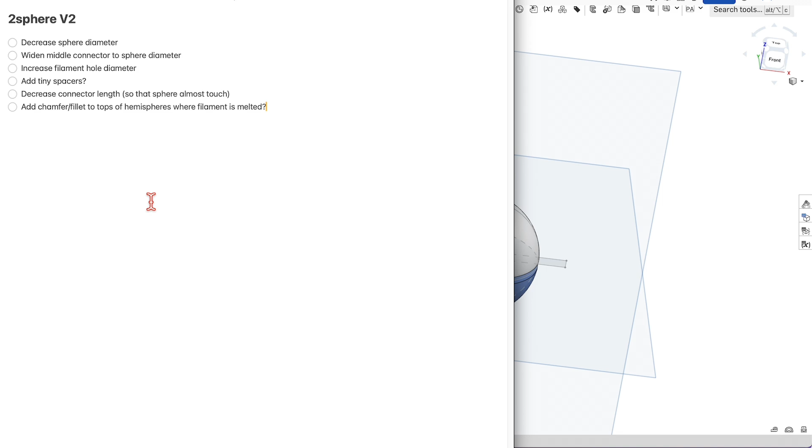So here we go. 60 minutes starting right now. Okay, that's not going to include 3D printing time. This is going to just include designing time, probably. I don't know. I make up the rules as I go. So there are a few things I want to change about this. And what I suggest whenever you are designing something is to have a list of the things that you want to change or the changes that you're going to make for V2.

So this was V1. Some of the things that weren't working well: the holes that I designed in here for the filament to go through were not large enough. Actually, let me just show you this. That probably makes more sense. Here we go. So here we are in OnShape, which is what we're using for modeling right now, and you can see that we have this model here.

The holes right here that run all the way through both hemispheres for the filament were not large enough because you need to make the hole a little bit larger when you're 3D printing it, because of the tolerances of the printer and all that. So it's going to end up a little smaller generally. So I had to drill those out to actually fit. So we're going to enlarge those a little bit.

Let's go back to our list just to show you some of the things that we're going to do here. We're going to decrease the sphere diameter because I feel like they're just a little bit too big. So the idea with this, I probably should have mentioned this: the reason why this is fun is you can roll it around in your hands, like those steel stress ball things, or maybe they're magnets. I'm not really sure. That's fun. You can also take it and spin it like that, which is fun too.

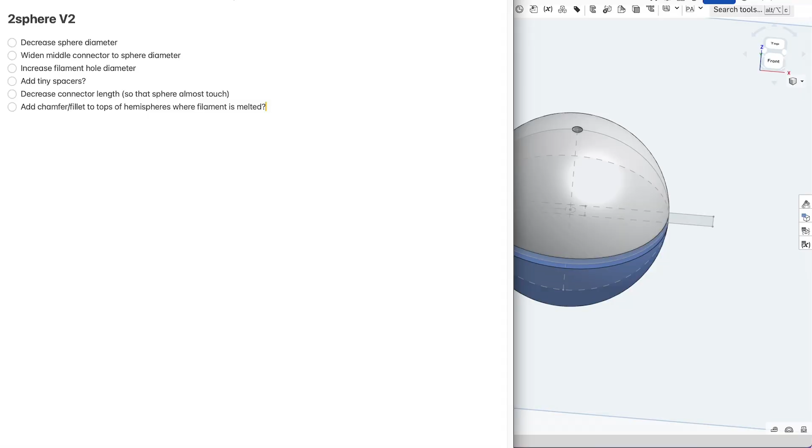So step one, we're going to get into our sketches here. Like I said, this has already been designed, so we're just going to be going into this and modifying it. I'm not going to explain a lot of what I'm doing exactly, but hopefully you'll kind of learn as we go. I'll try to narrate a little bit. All right, so actually I'm going to narrate a lot. Basically this is not a tutorial, but it's more of like a come along for the ride. But I can't really help but narrate stuff because I talk to myself anyway.

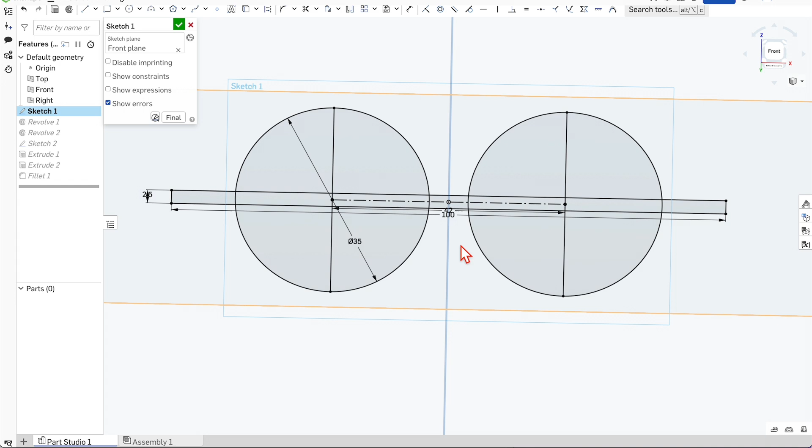So 40 millimeters is the diameter of the hemisphere, and these are the two circles that I built this shape off of. So we're going to change that to, I think 35 would be good, and they are mirrored, I think. All right, excellent. So we've already decreased the diameter, which you'll notice makes more of the middle connector showing. So we also want to change the middle connector.

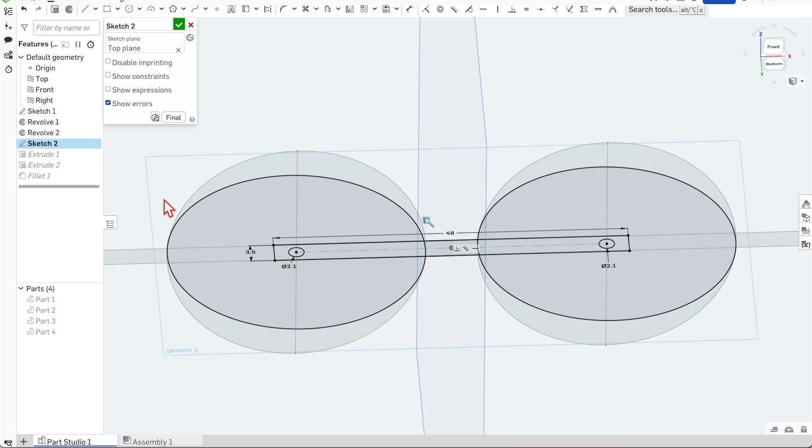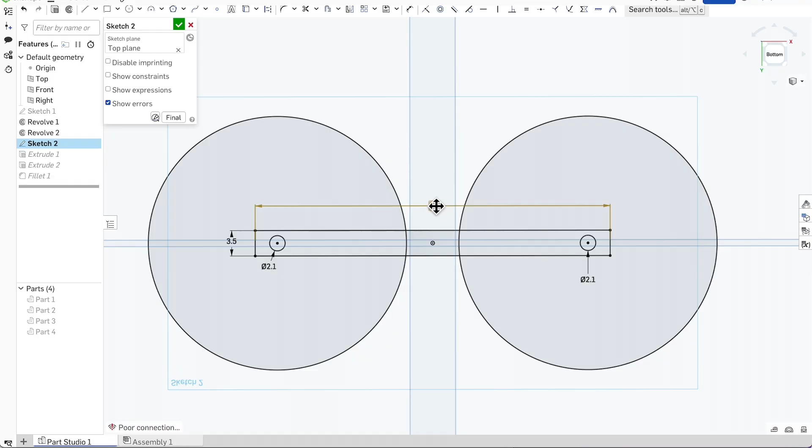You can see when I run the mouse over Sketch 2, that's the connector sketch. Let me hide everything else so that we just get that one sketch. Hide that sketch as well. I've used the circles from that previous sketch into this sketch, which actually, now that I think about it, I guess I could just use those, huh? Oh yeah, okay. So let's take, oh, okay, that might screw everything up. This is the part that I'm not super great at with CAD modeling, keeping everything so that it lines up well and so that it's easy to make changes to things I've already done.

All right, so let's take the 48 millimeters. So if we have 35 and 35, then we want 36 maybe between the pivot points. Oh, except that's not between the pivot points. That is between the ends. Ooh. So what I want to do is, okay, I'm going to press D to get the dimension. We're going to do L and then Q to make it a construction line just for reference. And then I'm going to drag that to the other circle. Let me see if this will work now. So now we're going to do D. We're going to dimension that line.

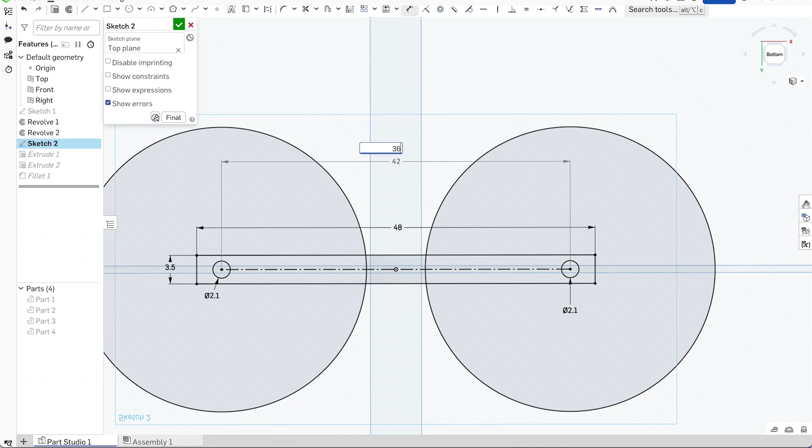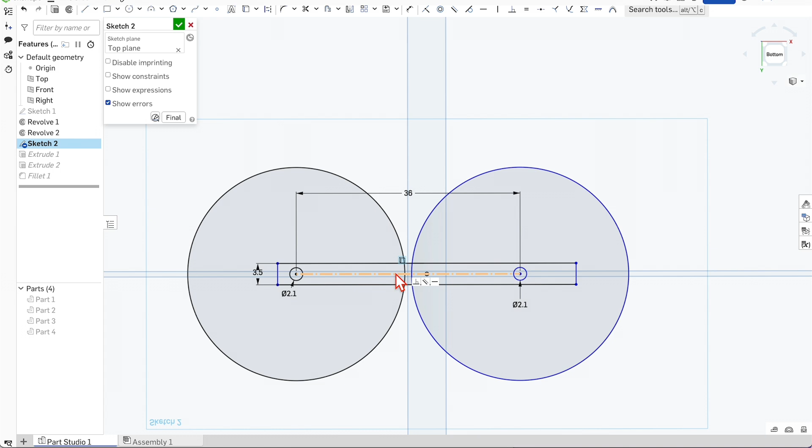So 42 millimeters is what it was. So we had essentially a 2 millimeter distance between the circles. But now I really actually want like 36. So the diameters of those are 35. So let's make it 36. And that's not working, probably because I have this dimension here. Can I delete that? 36, can we do that? We can't do that. Let's see. Oh, okay. Something is locked? There we go. Okay, cool. Great. All right. So let's see what that does when we show all of our parts here.

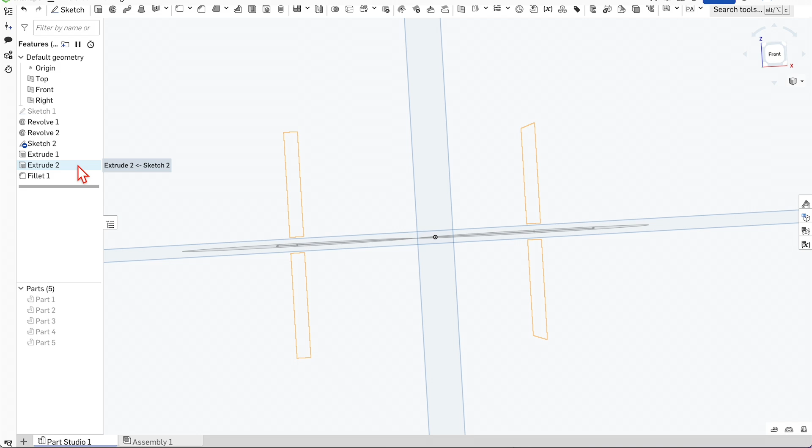So what that has done is, basically not nothing, but let's see, so that one's lined up. This one is not lined up. Is it because of the extrude? Well, that extrude was based on sketch 2. So I've changed sketch 2. So why hasn't that changed as well? Looks like we've got a conundrum on our hands.

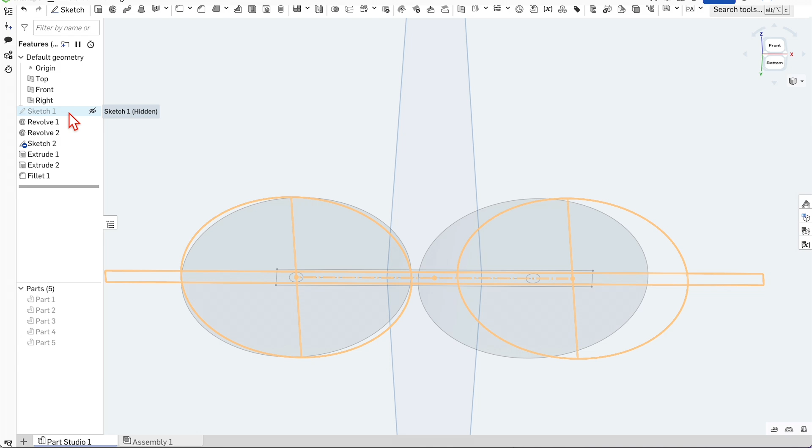So sketch 1. All right, so these need to be lined up. These should be lined up. What's going on with sketch 1? Oh, okay. So I did change the diameter, did not change the distance between the two circles. Okay, my bad. Obviously, because I'm the only one doing this, so that was my bad. 36 is what we want. Boom, there we go. Okay, and then let's see what we're working with now. Let's show all the parts. Okay. Yeah.

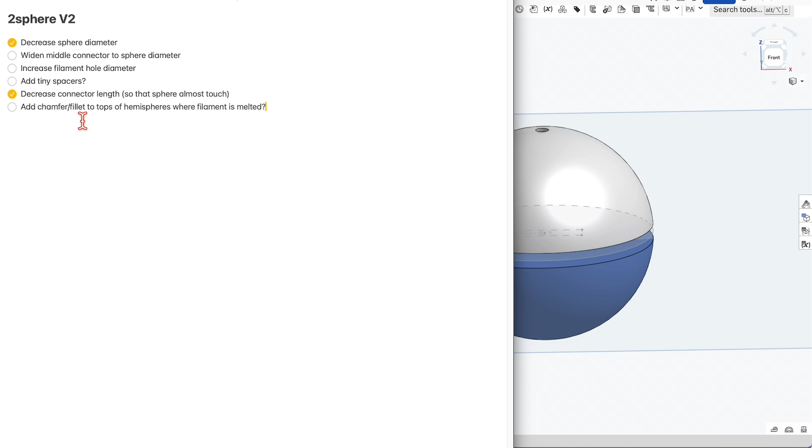I'd almost want maybe less than a millimeter, but we'll just give ourselves a millimeter because we want this to actually work instead of being too close, because if it's too close, that's no fun at all. It's just broken. It doesn't work at all. So we'll give ourselves that. So we've decreased the sphere diameter, and we've decreased the connector length. Okay, great. So now, I think I did that right. It's actually surprisingly hard to do this when I'm recording it and talking about it.

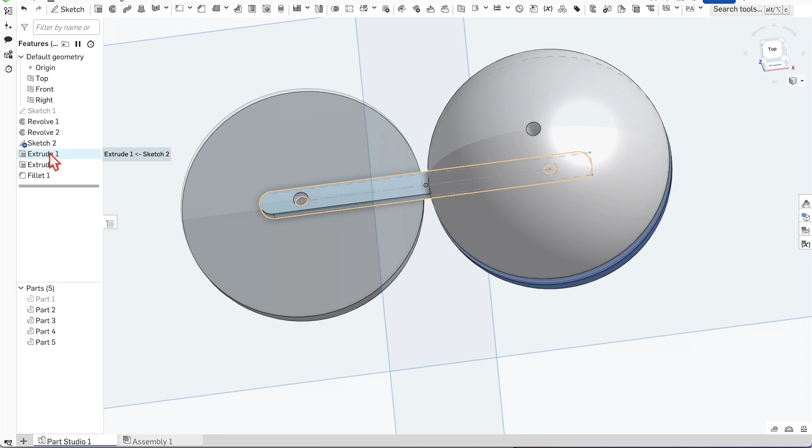I usually narrate out loud. That's not really strange, but making it make sense is the tricky part. So check this out.

So let's just click. So we're in this extrude that I did to create the middle connector. So this is what the middle connector would look like now, right? So it would basically be a disc, and it's connected just like that. So I'm going to add fillets and stuff because we still don't want this really, really thin connection, even though it looks kind of cool that they're like barely connected, but that makes it way less durable.

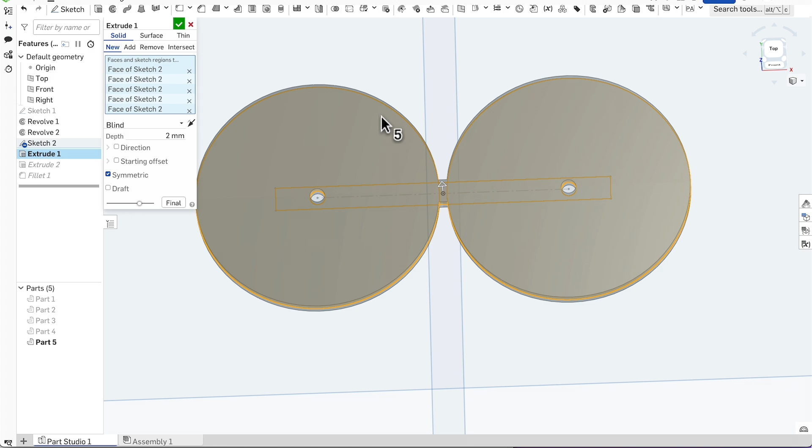So theoretically, okay, wait, how could I? Okay, I'm not going to worry about trying to add teeny tiny little spacers right now because I don't know how I would do that at the moment. We need to get this one out and give it a try first, because also I don't know how we would do the spacers without giving us that wobble again, and then it wouldn't be smooth. And then we're probably going to lubricate this with like a dry film lubricant, food safe dry film lubricant.

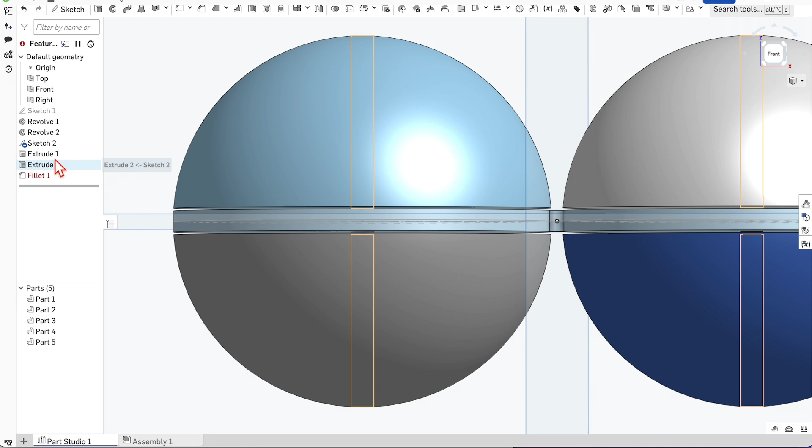All right, cool. So we do have a gap, so we wouldn't have a perfect sphere, which we kind of should change. Why do we have that gap? That's a good question. Let's take a look. So we've got a bit of a gap. Oh, okay. Well, we just basically need to increase that extrusion. We could do it different ways. It's actually the sketch. It's sketch one. So actually, for sketch one, we would... no, because that's 2.5. That is what that is.

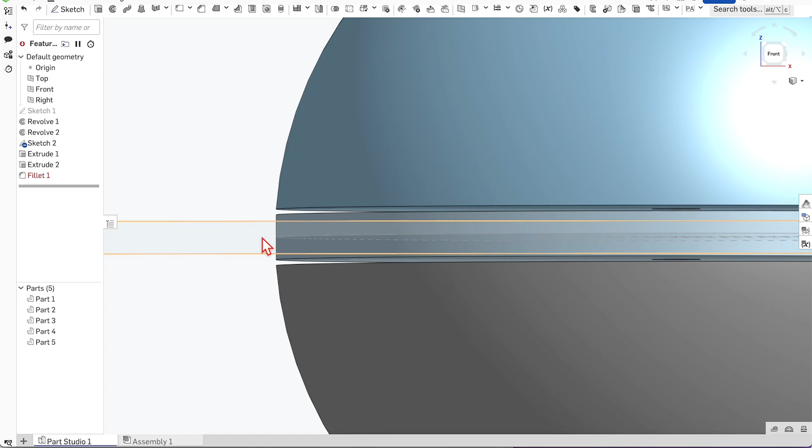Did I do an offset? What did I do there? Because that would be a revolve. Oh. Okay. So you can see here, this might not matter. I'm not going to worry about it right now. You can see here, though, that we have this curve of the ball, and then here it's straight. It's not curved. That kind of bothers me deep down inside, I'm going to be honest with you.

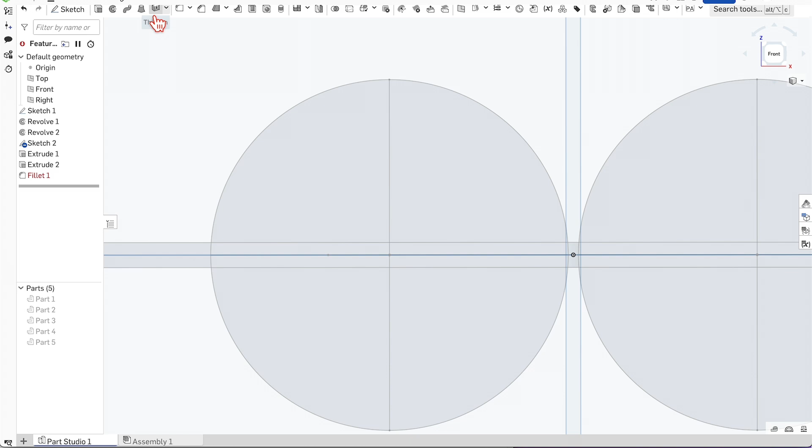So potentially one way of fixing that, and also potentially causing other problems, is to get back our sketch one. And you see in this segment right here, it's curved. So we're not in the sketch, but we have our sketch showing. We're going to go up here to revolve, and then revolve this section on this axis. Shabwam. And now we have a solid body with the curve of the sphere. And can I do more than one? No, I better not, I guess.

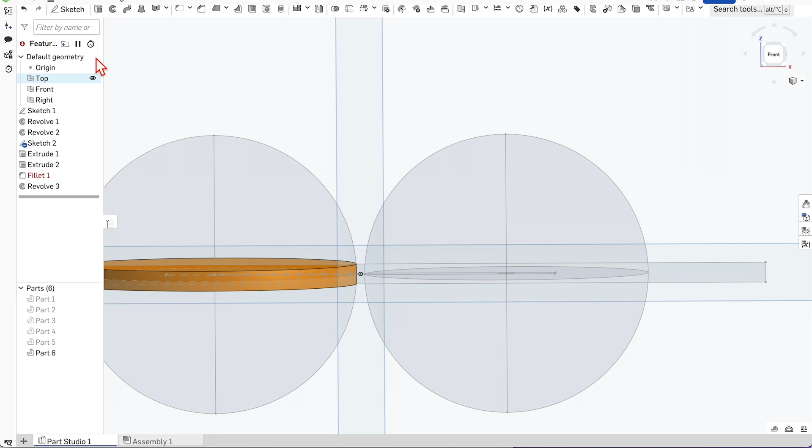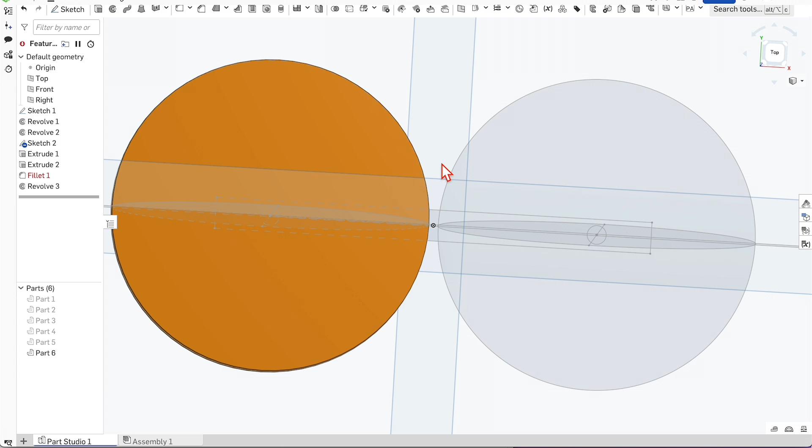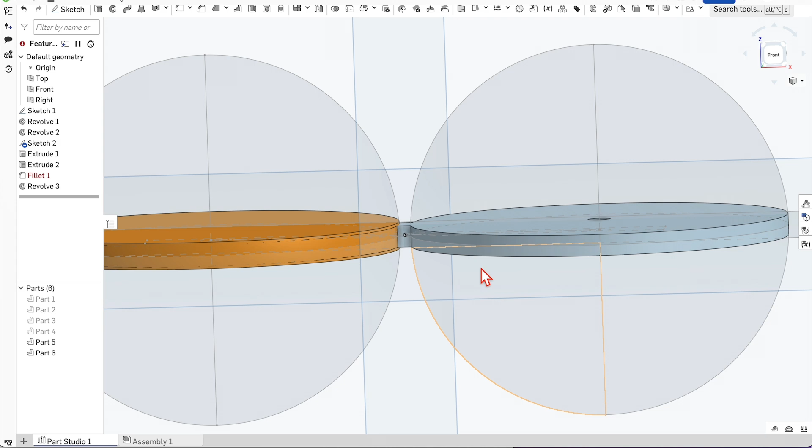And then, of course, I guess I could mirror that to the other side, but anyway, for now, how would I do that? Oh yeah, that's not really a problem. I realized I could have just done this instead of doing the other sketch with the circle and the hole and stuff. It does help for the hole. So let me just take that part, right? Because I did this part in the Z orientation, looking straight down. But now I realize, aside from the connector, we don't really need to do that. But I'm not going to go back and change a bunch of stuff.

What I'm just going to do is once again do a revolve on this side of the sketch, and then get our revolve axis, which is going to be the axis of the circle there. Okay, cool, great. And then I'm going to take part 6 and part 7, and go to Boolean and connect those. So we're actually going to union part 5, 6, and 7. I don't really want to keep the tools. That's just going to be confusing. So don't keep the tools.

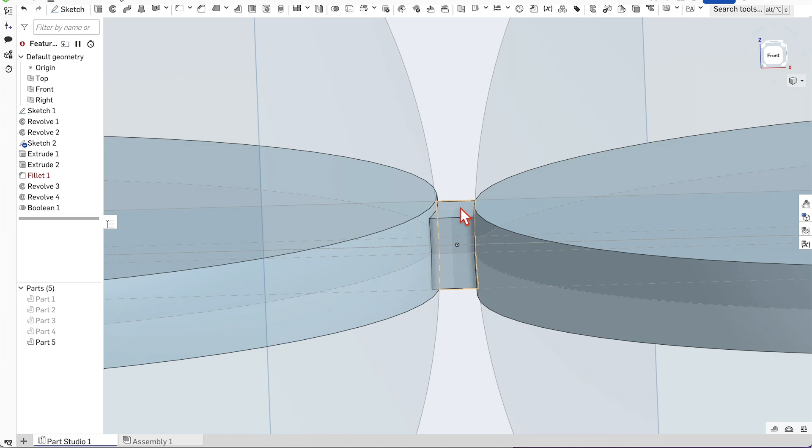And then, great. So now we have a single part here, which I realize now that connector needs to be larger. How did I do that last time? Actually, because if I have that, is it better that it's not larger?

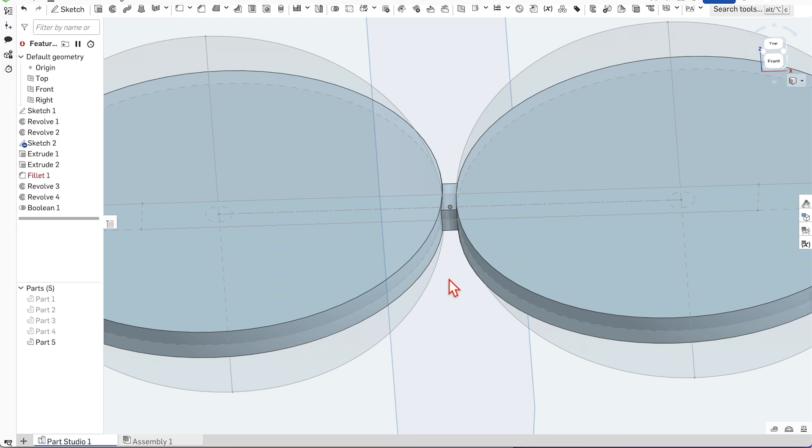Maybe. Let's just leave it alone and see what happens. Yeah, okay. And then, so now, let's show everything. Boom, so there we go. So you'll notice in here, we don't have any tolerances, which is not really reality, but at the same time, these parts are just going to be stacked. That's the idea.

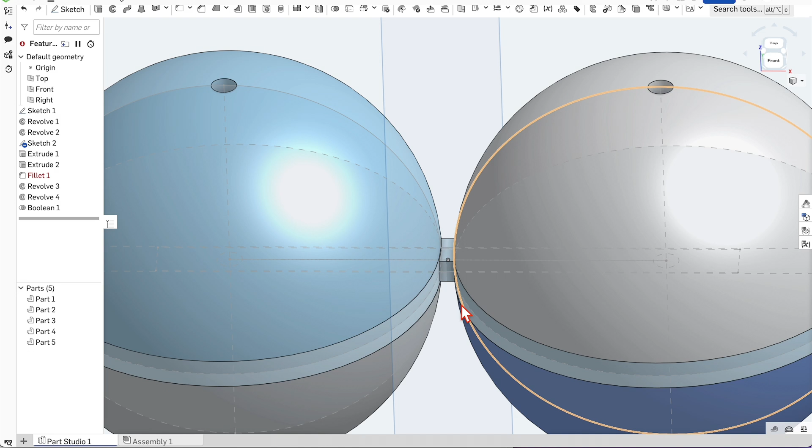All right, so just a couple more things here that I want to do. Let's hide everything again. The other major thing that we need to do is get into Sketch 2. We're going to go to View Normal to Sketch Plane so we can see it flat. And then 2.1 is what I did for the hole.

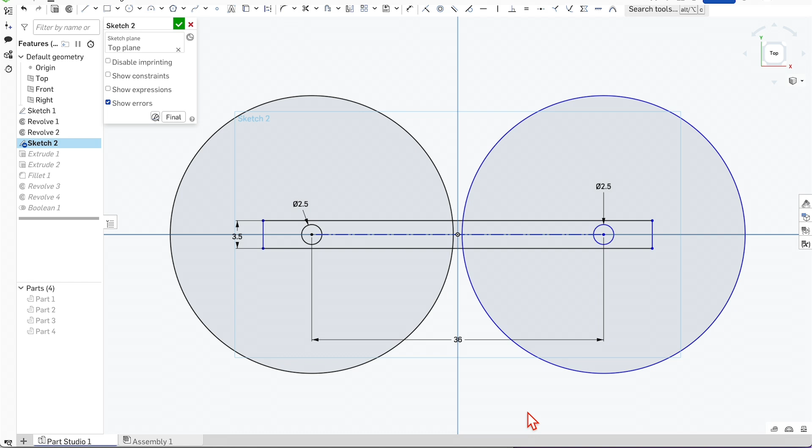Because the filament is supposed to be 1.75 millimeters. But let's just be generous and do 2.5. Yeah, that'll be better. Be on the safe side. Because again, as much as I do love to just try to go for a final version right out the gate, it's better to just do it incrementally. Is that 2.5? I guess it is. Well, it's not going to be much bigger.

But anyway, what I want to do here is add in the sketch. Let's go ahead and do it in the sketch, I guess. So in the sketch, we would do a fillet from here to here. Oh, we can't do that. All right, that's fine. We'll just go with that. And then we're going to show all parts. Or no, not all parts. Hide all of those except for part 5. And then I want to see if I can do a fillet.

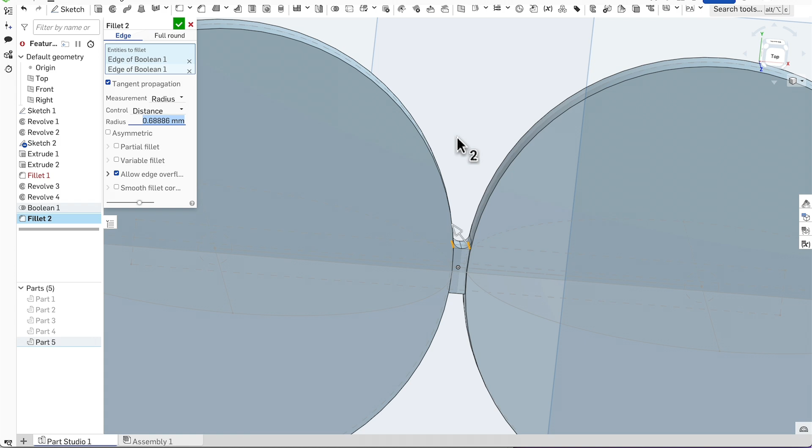Also, we haven't actually changed anything with the hole sizes, so we've got to keep that in mind. Darn it. So I want to do a fillet like that, but I can't. That's okay, it doesn't have to be a fillet shape. Before I forget, let's hide everything. I'm going to go to Sketch 2. We're going to go to Extrude, which, actually, did I already extrude? Oh, okay, I already did do an extrude. Let's take that extrude so we don't have multiple extrudes.

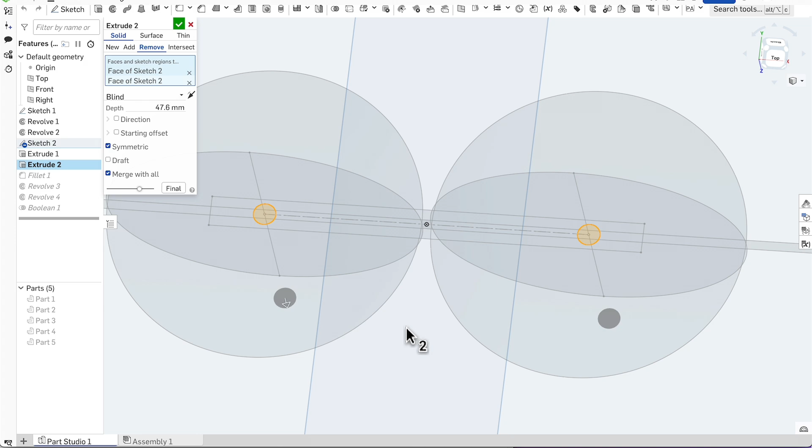Oh, here's something cool. So now I took that same sketch and I had the extrusion for the filament coming out of there. I'm actually going to just leave that alone. And then what I'm going to do is take that extrude. Maybe it does need to be bigger. Darn it. Okay, yeah, it does. It needs to be taller. Let's just make it really tall. Okay, great. I think that's right.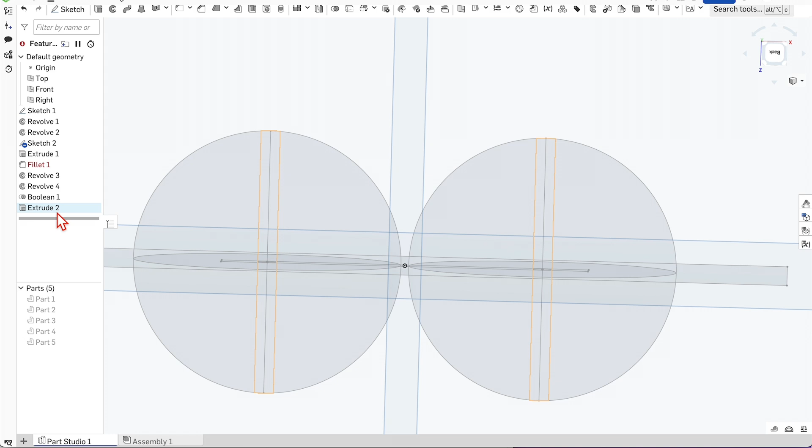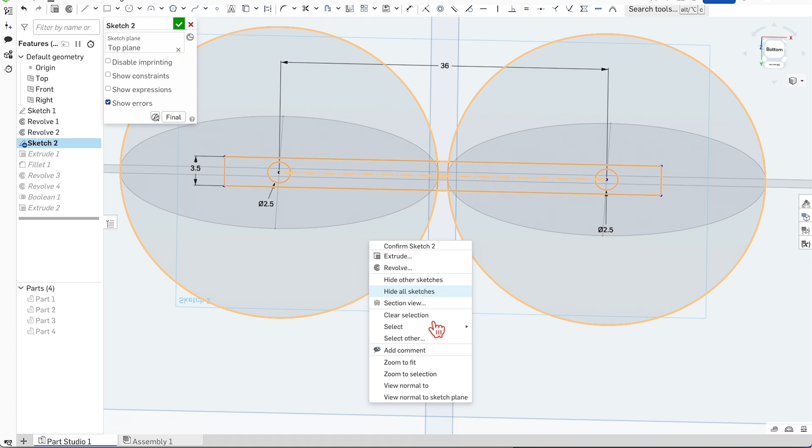And then we're going to take that extrusion, or really cutting away, removing filament, and drag it down so that it will show up after all of the other parts that I've created. So now we have a nice hole running through everything. All right, cool. That's really great. So next, we're going to go back to Sketch 2. I'm getting confused here. Let's say View Normal to Sketch Plane so I can figure out what's going on.

There we go. So it's not a fillet, but we're going to add a 3-point arc. How far out do I want this to go? Not super far out, but maybe like, it should match up. Is it going to match up? I'm trying to take it straight across. Is that even? Oh, look, I can use the little point. I can't show it, but right by the 36 number, I can see the center point of the arc, and I can line it up on that line. Kind of. That kind of works, right?

And if I drag it enough, it should... let's just do it like that, and then press enter there, and then we're gonna get our concentric constraint. Or dang it, not concentric. Tangential. I'm gonna click on our curve, click on our circle, and that way it's a nice smooth transition there. So that should be also very satisfying.

In fact, now that I think about it, if we take a look at the spheres here, the other thing that's fun about this is to put it in your fingers, kind of like you would with a coin, and dance it around in your fingers.

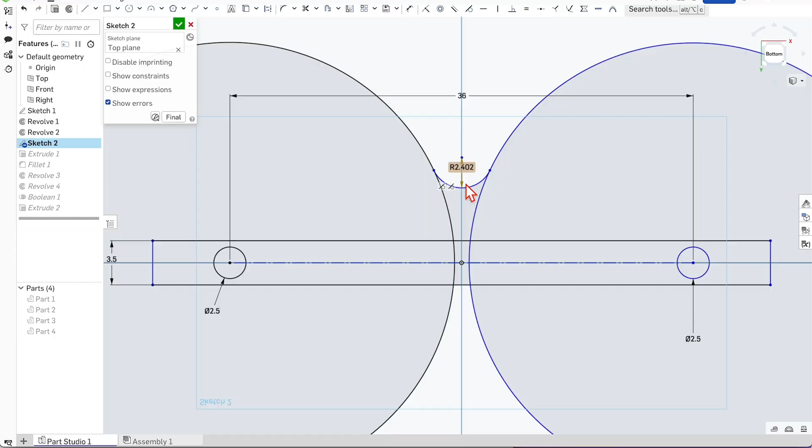But you see the gap here, that might make sense to just have the middle piece basically follow the curve of my finger. What we're going to do is to make sure that this is the same on this side, we can just use our little mirroring feature. So select the line to mirror. So we want the mirror line, which is going to be the center line. And then we want the entities to be mirrored, which is going to be like that.

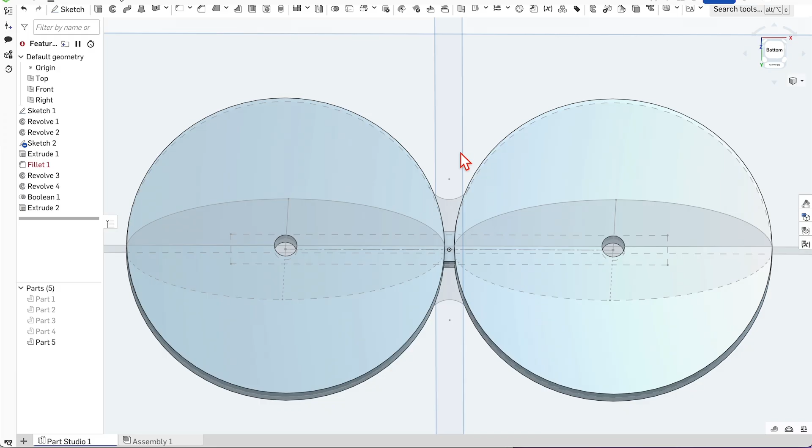So is this going to be good? I don't know. That's why we're going to try it out and 3D print it. And, you know, it'll be great. So what I'm going to do is actually, I'm going to go to this extrude and just include those little parts that I made there. Oh man, sometimes my vocabulary of this is not the most goodest. Anyway, and you can see it is a little shallow.

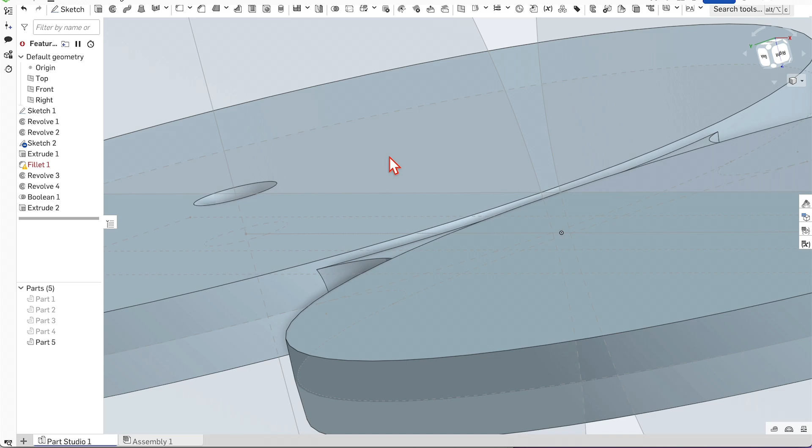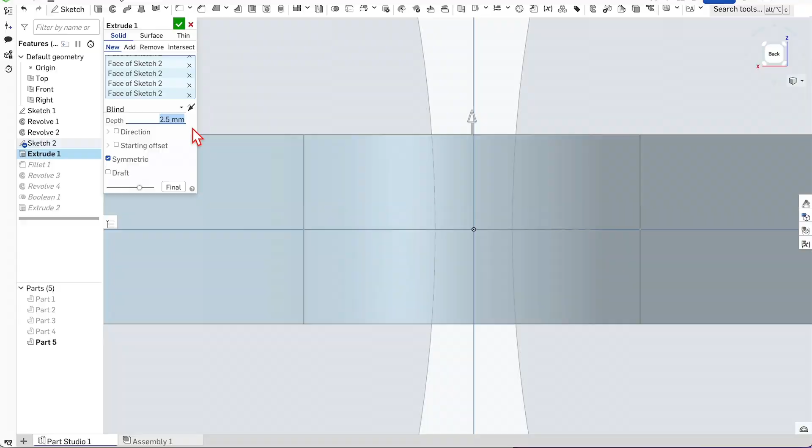I don't think we want that. Let's go back to that extrude. Where'd it go? Extrude. And it looks like, let's line it up on the side. So we can see here, we really could do probably like what, 3 millimeters? Wow, that's way too much. 2.5 millimeters? 2.4? Yeah, we could do something like that. We could do 2.4. I mean, we could do 2.5. Let's just do it, because again, we don't need to have tolerances built into these parts, because we're not going to be 3D printing them together.

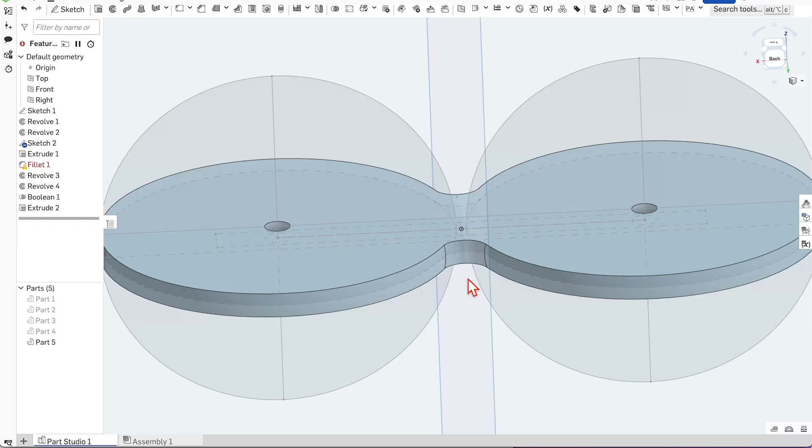Okay, so that looks really good. Looks nice and good. And I had some kind of idea about something. I have a hunch that it might be a problem that this middle sort of rotational part is the same size as the exterior of the circle or the sphere, but I could be wrong, so we'll just have to see about that.

And then I was thinking about adding some ridges on the outside as to reduce the friction theoretically, but I don't know about that. And then since this would be printing flat, I couldn't have it on both sides. It would just be on one side, and then it would just be weird. So probably not going to do that. We'll figure something else out. I mean, theoretically, I could do an internal bearing inside of here. So we're not relying on the filament to be the bearing.

That's just one option. We could also add a chamfer there, but I'm not gonna, because it's easy to get carried away with chamfers. You know what I'm saying? All right, cool. So now we have this. This looks much more like an actual thing, I think. It looks much more cohesive, I think.

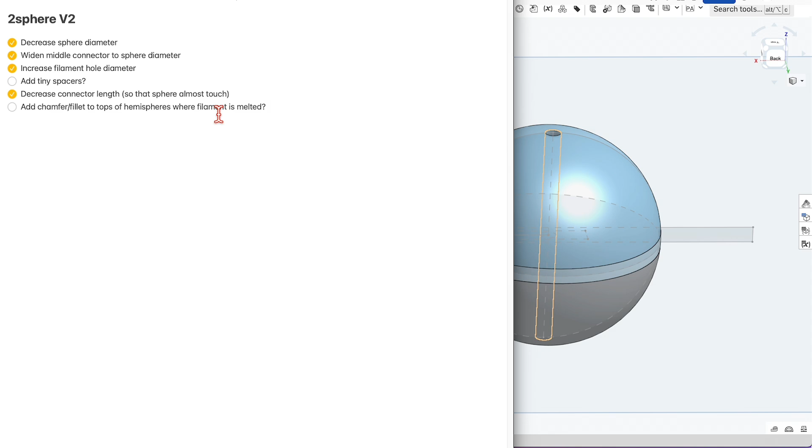So let's go back to our checklist here. We have widened the middle connector to sphere diameter. We've increased the filament diameter hole. We're not going to add tiny spacers. Yes. And finally, adding a chamfer / fillet, basically like a divot to the top. So let's play around with that real quick. So basically, the simplest way to do it would be to say, hey, we want probably a fillet on this top hole right there. Oh yeah, see, so it's nice and smooth.

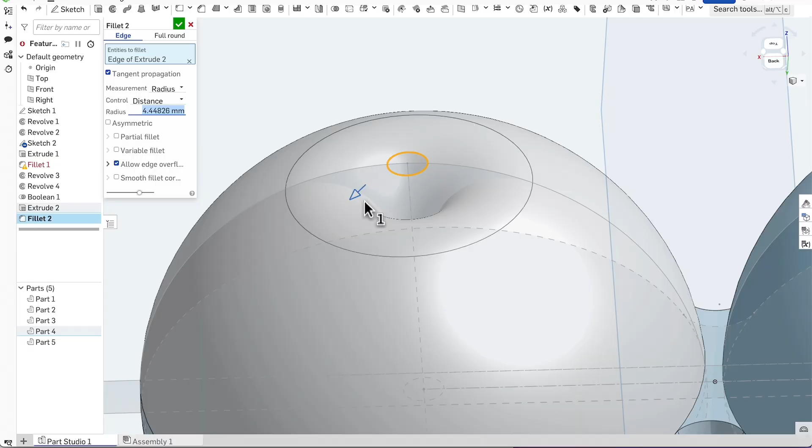Obviously, if we want to get it the smoothest, then we would need to adjust the layer height. Wow, look at that. It looks like some sort of vortex, which is actually pretty cool. That's nice and smooth. But would it actually be that smooth in real life? That is the question. And I'm not sure. And then, as you can see, we're taking away from the spherical shape. And do we want that?

I don't know. Camera lady doesn't know either. There's no way to know.

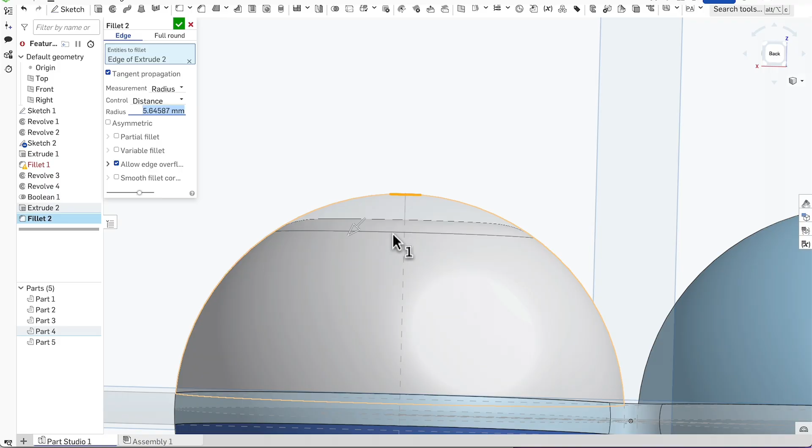I guess I could do it on half of them, just to see how I like it. In fact, let's do that. Let's just play around with it, even though that's going to be a pain for doing it later, but whatever. Smooth fillet corners. What does that do? Oh, nothing. For this variable fillet.

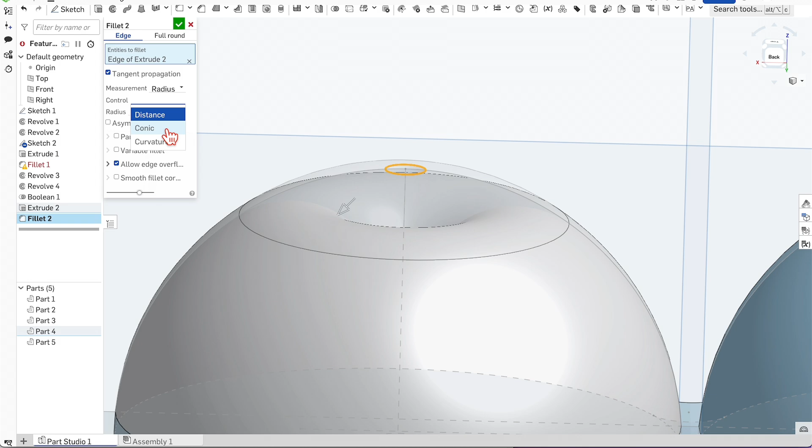Smooth transition. No, I don't want to mess with that. So distance curvature. Oh, okay. That's probably a little bit more like it. It's a little bit hard to see with how this whole thing is. I don't know. We're just going to have to figure that one out. That is interesting, though. So 5.646. Let's just call it like 5. How about that? It's way easier to remember next time.

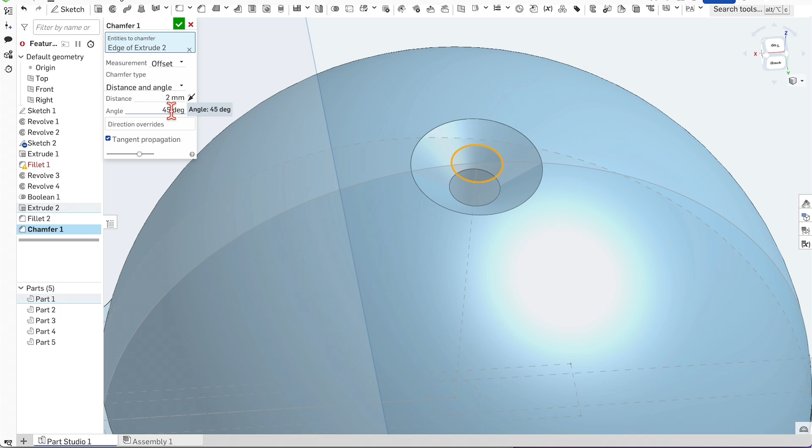So theoretically, oh, you know what though? Doesn't that make the hole much larger? I don't know, but that's fun to play around with. And then let's just say, yeah, sure, we want that. So this one, we could do a chamfer. So a chamfer is like a straight wall like that. So that's what a chamfer is. And we could do, let's kind of zoom out here a little bit, because it's very easy to get really into it and then think that you're dealing with really large areas or surfaces when you're not. It's like very, very small.

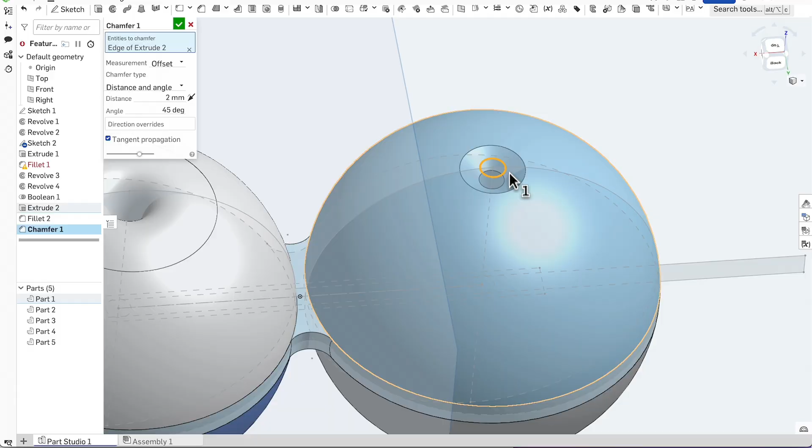So if we just take our handy dandy calipers and we kind of look at the filament, when it's smushed down, it varies, but it actually smushes out to like 2.8 in that case, 2.2. It could be larger, it could be smaller. Obviously, you want it to be big enough so that it doesn't come apart. So at least, potentially 3 millimeters, but 2.5, right? 2.5 millimeters, which is actually the size of the hole, but it's actually going to be smaller when we actually 3D print it.

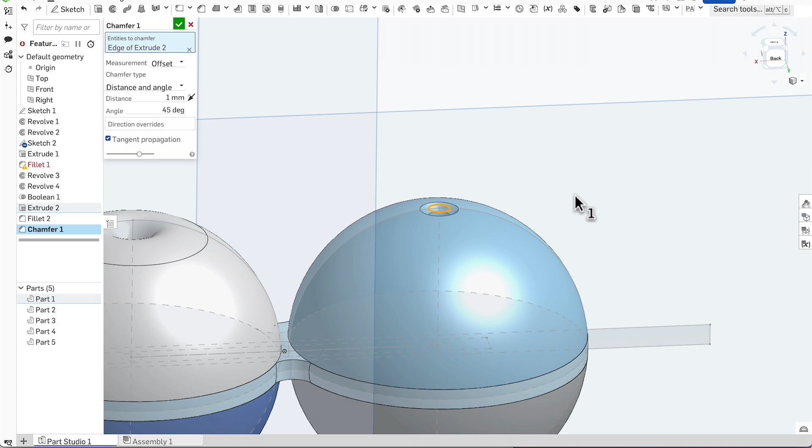So anyway, the point here is we don't want this to be too deep. And so I think 2 millimeters is the depth. As far as the depth, 1 millimeter is very much less deep, but in a sense of keeping it like a ball, we don't want a huge amount. We might not also want that to be 45 degrees. Maybe we want that to be, well, let's see, because if it's too deep, or if it's too shallow. Let's just go with 1 millimeter, 45 degrees.

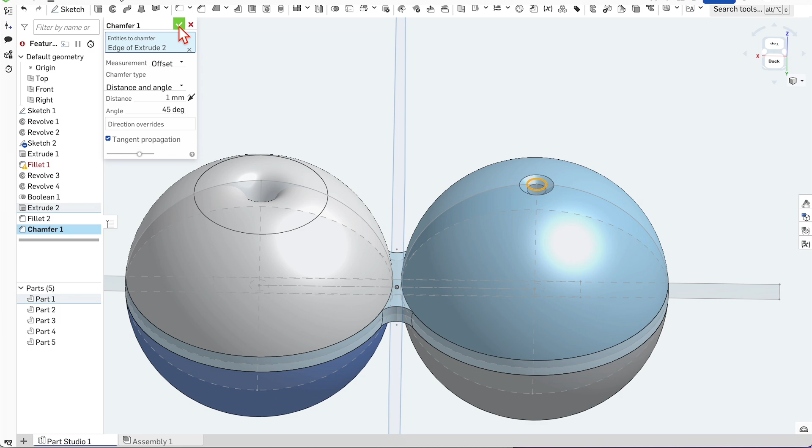And then, the other part of this that kind of takes time is exporting things and then seeing how they look in the slicer. So let's just say if we wanted to do that, yeah. So between these two, which is nicer? I don't know. Let's do this. We're gonna take this part. Oh wait, why are there two parts? What's going on? All right, we need to deselect the top, front, and right planes, because then we'll keep selecting that and that'll be annoying. So I don't know why that is a separate entity.

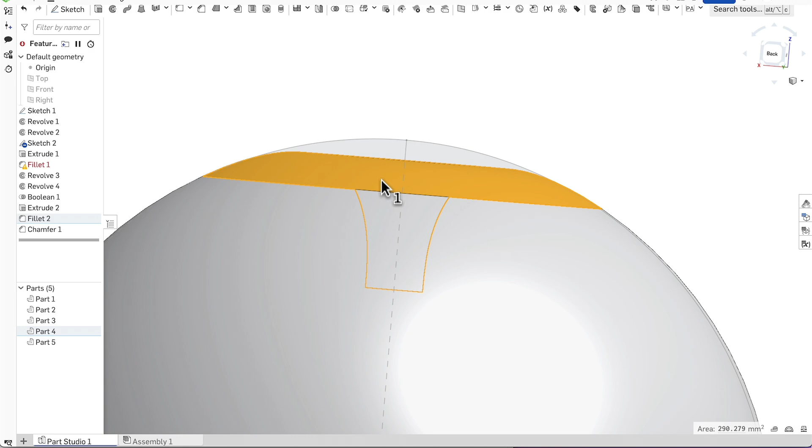Oh, okay. So this is what I don't like. You see how when this is selected, you see how much it's widening and then it gets to the top. We don't really want that because we'd have to melt that filament quite a lot, which is an interesting concept actually.

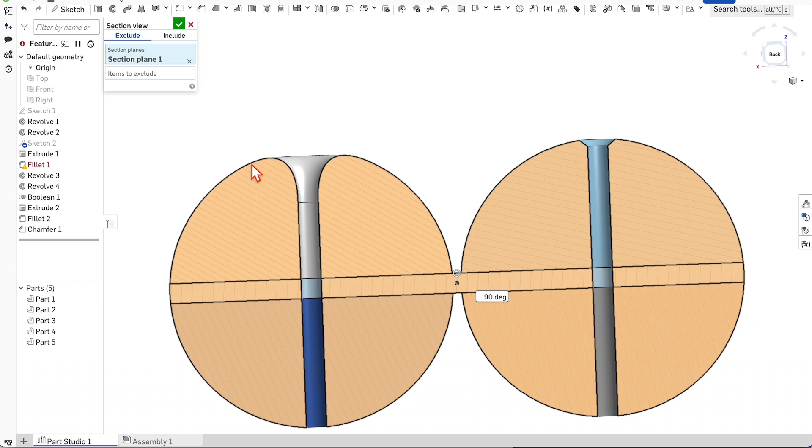All right, here's another cool thing we can do. We can do a section view of this baby. Go to 90 degrees. And then let's make that part visible again. Boom, there you go. And now you can see the difference between a chamfer on the right, very simple, very small, versus a much smoother shape on the left. And of course, we're going to be building this up layer by layer with the 3D printing. So as far as the smoothness, it's actually going to feel less smooth the more gradual that curve is, at least theoretically, but that's a fun thing to see there. So let's turn that off for now.

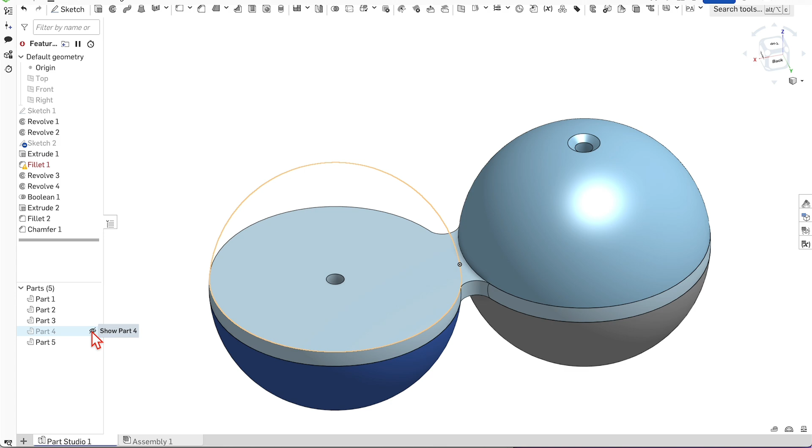All right, so let's get this. So this guy and this guy, are they? So that's part 2, part 3, part 4. All right, so that's part 4. We're going to export, and for now we'll just call it part 4. Export. This one, part 1, we're going to export that as well.

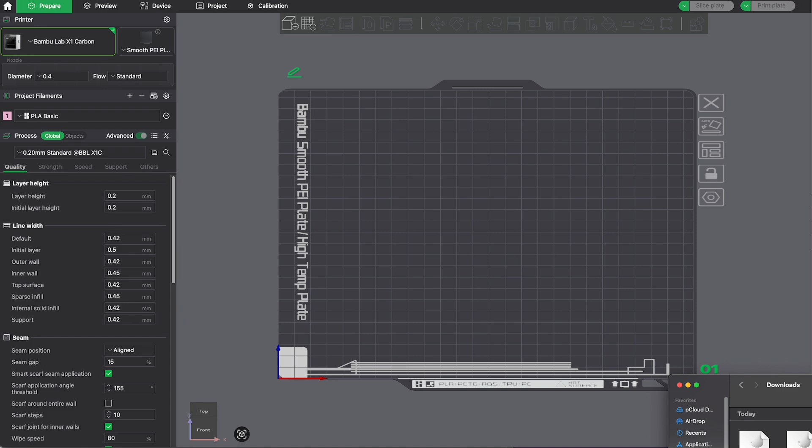Export. Okay, now at this point I'm going to open Bambu Studio, which is what I use for 3D printing stuff. I have Bambu Studio up, and now I'm going to take those two parts that I exported from Onshape and drop them in here. There we go. There's the other part. They were stacked on top of each other. Okay, so now we'll just slice it. These are going to be the standard Bambu Lab settings, which I'm going to change for sure.

And we can see that's layer height. We don't want that. Let's go to filament. No, let's go to line type. There we go. So now we can see what's going on here. Oh, okay. So I'm glad we did not go with just that. So it's a super simple shape. It's a half sphere.

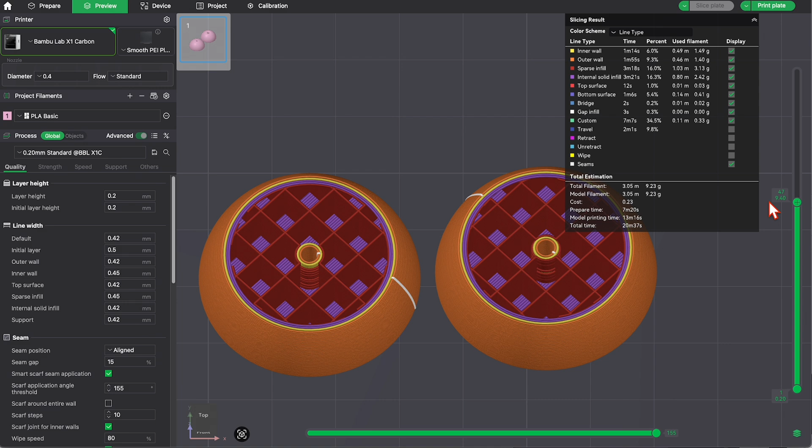But the difference is right here: once we get to 9.4 millimeters or so, it really starts to widen out on the one that we did the fillet. So that's not what we want, because then we would have to have a lot of filament to be able to squish, and then it's very likely it would slide through. So we don't want that. So we could potentially just decrease that

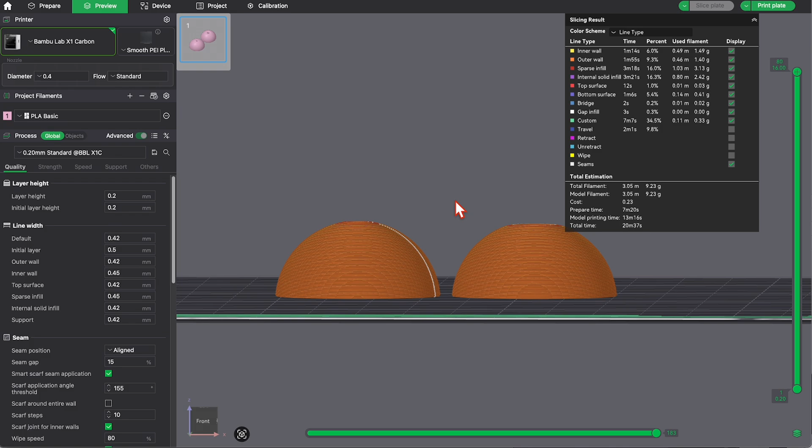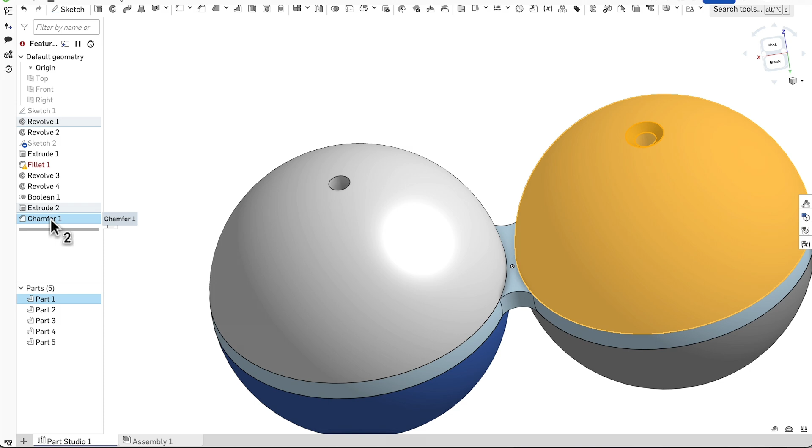All right, so let's go back to Onshape. We're gonna get rid of this fillet. I don't like the fillet. I'm not filleting it. Then we're gonna go to this chamfer. The chamfer even, I'm not sure if I'm feeling the chamfer. It is really small though. We have to keep that in mind. That's probably gonna be quite small. So I'm just going to trust that that is the correct amount. I'm going to click on all of the holes on the hemispheres, so that it will be the same both ways.

Also, wouldn't it be cool to make a Pokeball version of this? I think that would probably sell really well. And you could do other things too. One idea was to make one of them smaller and one of them bigger, and then you could have the big one be yellow and the small one be blue and green, which is like the Earth, and the Earth could orbit the sun, or the sun could orbit the Earth. That could be pretty cool.

Or, using different filaments, you could make them look like eyeballs, which would be kind of creepy. But you could do different eyeballs on each side. Or another popular one I just thought of, you could do emojis, maybe smiley faces, but have different sides be different faces. That's all I can think of for now. So we're going to actually click the check mark.

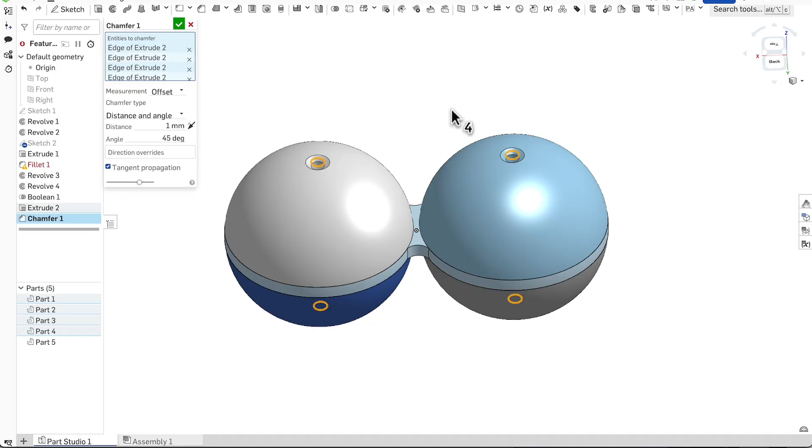All right. And you see why this is a challenge for me to design something or redesign something within 1 hour. Oh boy, my editor is going to have a lot of fun with these videos.

So I think that's it. I think we did everything. Okay, great. So now what we need to do is make sure that we actually want all these parts. So we have 1, 2, 3, 4, 5. We have 5 parts, except here's what's cool. The reason why I didn't want to make 2 different ones is because that's a pain. And so what's cool is I can actually just export one part, part number 1 and part number 5. I'm not going to export them together because I'm pretty sure then they'll be stuck together.

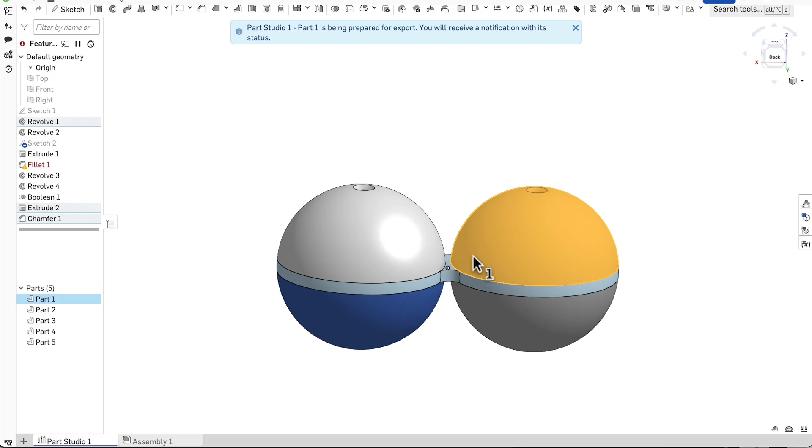So I'm going to go to my downloads and then just move those to the trash so I don't get confused. And then I'm going to click on the part, click export. I know it's the same part, but I'm just doing it again. So for now, we'll just do that. I'm not going to bother naming it. And then part 5, export. There we go. And that is part 5 again. I'm just not going to bother naming it.

And now that we have those parts, I'm going to go back to Bambu Studio, as I like to call it. And then what we can do is, so now we're basically getting into the slicing phase, and we're going to grab these 2 parts, drag them in. Do you want to load these as a single? Blah, blah, blah. No, never do.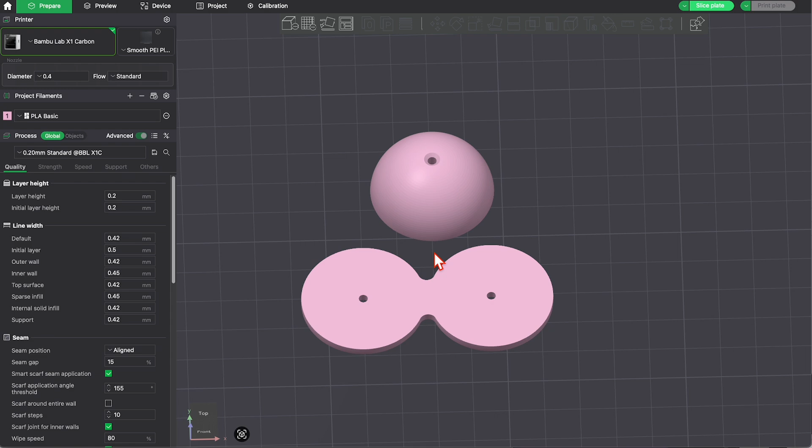And now we get to the part where I wish that I would just go ahead and make a profile instead of changing the Bambu Lab profile every single time. So I will do that, and then I'll make that available for anybody who also wants to be as awesome as me. So we're going to take this one, and actually a little pro tip here, I'm going to adjust the slicer settings and then copy and paste this one hemisphere. It looks like I have about 15 minutes left. We could probably do them both the same.

Yeah. So layer height 0.2, that's fine. No, it's not fine. Actually, I take it back. So, maybe I'm getting a little crazy, right? But I'd like to maximize my filament. So for this flat one right here, it doesn't really have vertical curves. So we're going to do like 0.26. I think it'll let me do that.

So quality, I'm going to do outer wall of like 0.8, which is really, really thick, but we don't need it to... actually, wait, do I want to do that? I'll just do 1 outer wall. So I'm just going to do 1 outer wall instead of 2 outer walls. And then that also speeds up printing time. That's one of the things that it does the most.

Top shell layers. So we do want it to be smooth, actually. I'm going to say at least 3, and 3 on that one, and then I'm going to make that 0. Yeah, so it changes it. Infill. We could do rectilinear, and we want it to be smooth. So we do want to have a good solid base on there. Let's just keep it 15 for now. I usually like to use rectilinear because you're going to get the most support area. It's not the strongest though.

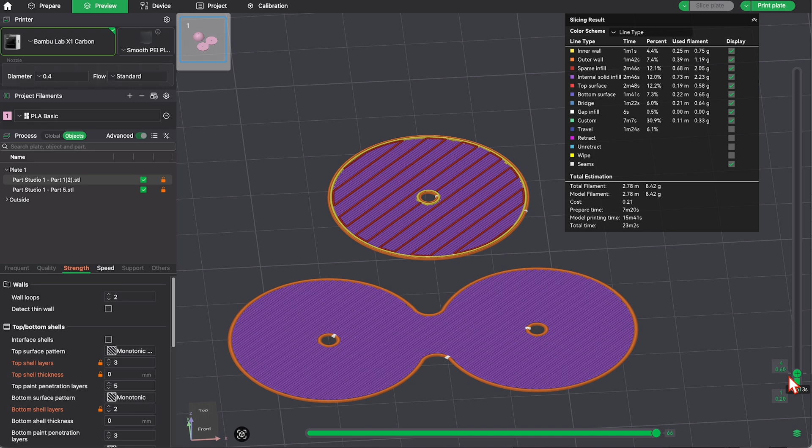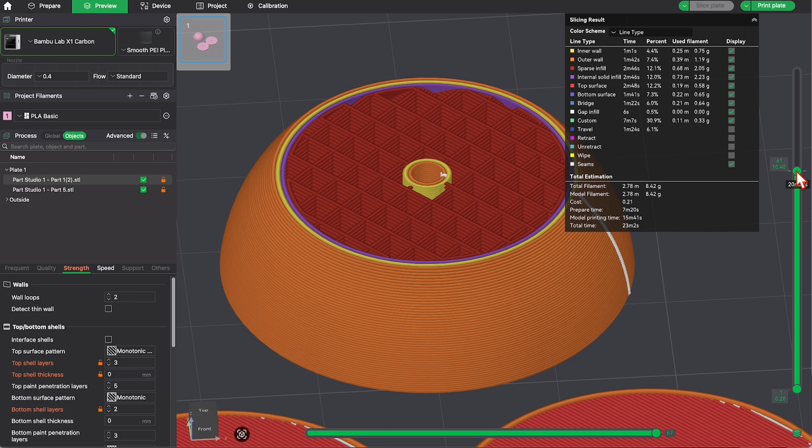Kapow. And let's start from the bottom. So we probably could just do 2 for that one too. Probably should do 2. I'm not sure why it's alternating the layers. That's something that I don't understand. It's rather strange. Well, in any case, we've got that going. Really, for the most part, that infill is not necessary for most of this because it's stacking straight up. So we could really probably reduce that, and I definitely will to optimize this thing.

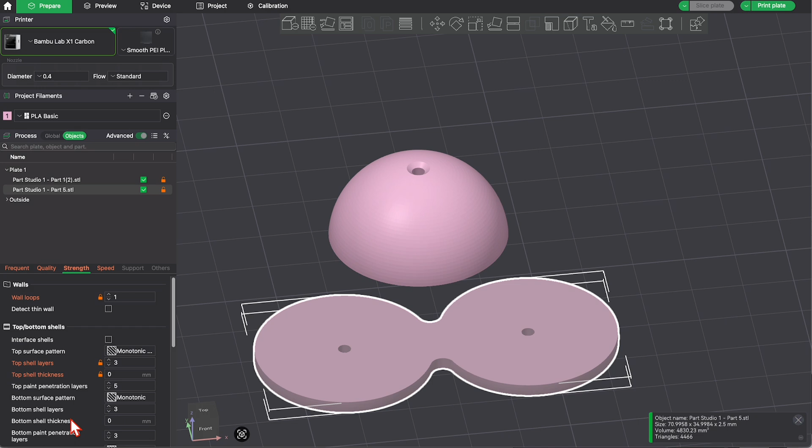So towards the top, what we want to do is actually decrease the layer height, theoretically. Not sure why I said that so slowly. And let's just go back here. If it seems like I'm nerding out on this and getting a little crazy, it's because I am. Don't judge me. This is fun for me. And if you're still watching, it's probably fun for you too.

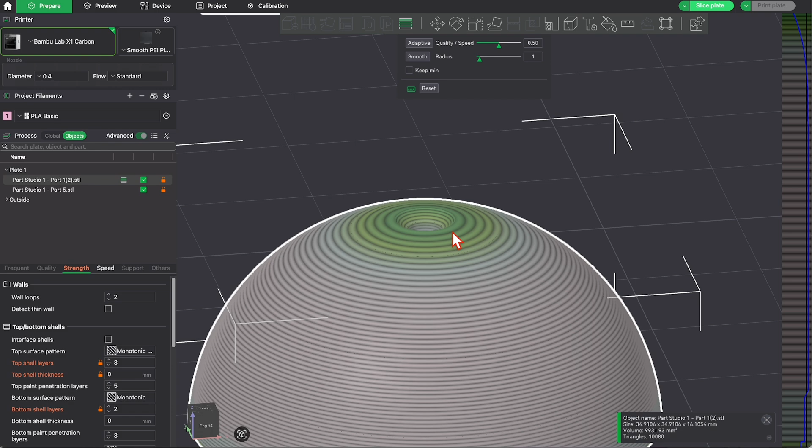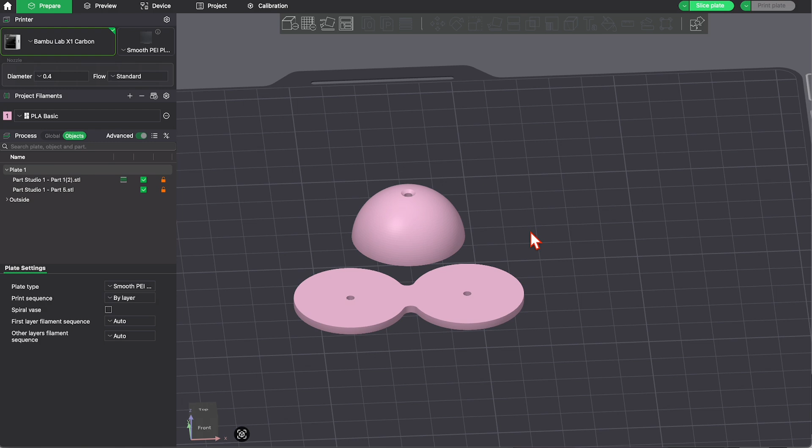Yeah, we'll give that a try. That should be pretty reasonable. And then also, it's just going to bother me if I don't change the amount of infill because we don't need 15%. We can do 10%. Because, hey, it all adds up. You know what I'm saying? It all adds up. Especially if you use good quality filament and it costs more, which is why I actually use the 3D Fuel Refuel filament when I'm doing prototyping.

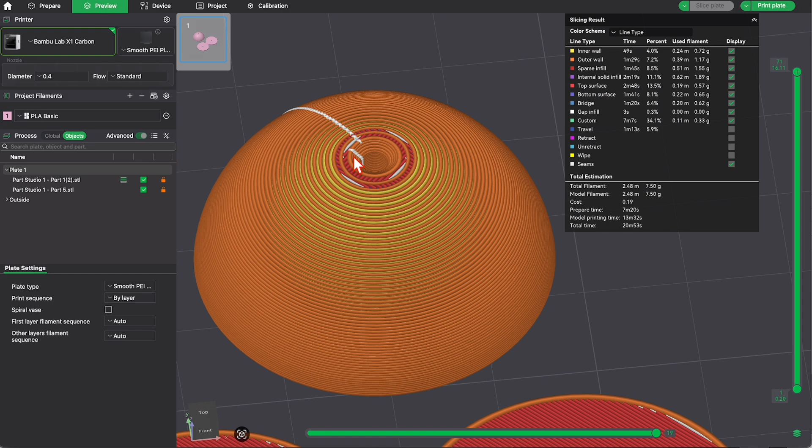Anyway, that looks pretty well supported, but again, this is not the final version. Up here at the top, we'll just have to see about that. All right, I need to stop talking and stop slicing and actually start printing. So copy, paste, paste, paste. And I think that's all we need really. And then go ahead and arrange that so it's nice and pretty. Let's do this on the

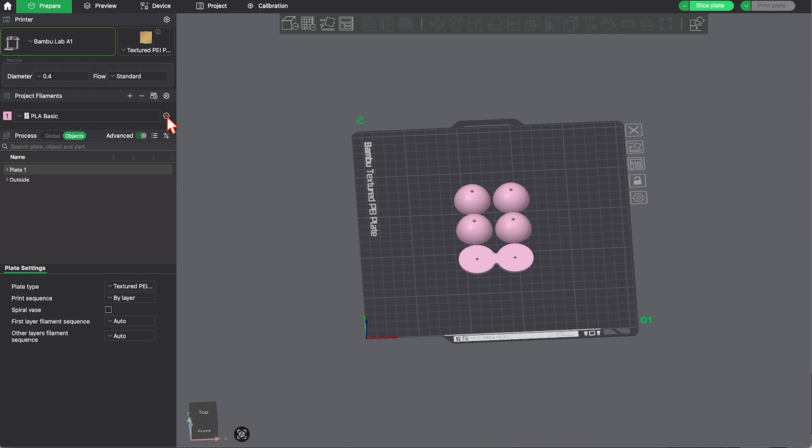A1. We're going to do this on the A1. I have the A1 and the X1 Carbon hooked up right now. Let's change this to 240C 3D Fuel. Okay, and that should be it. We got textured build plate. We got to make sure our device, got to change it to the A1. Slice the plate again. Okay, and so about 41 minutes.

How cool is that? That in 41 minutes, plus all the time that I spent, we can take a design and turn it into an actual physical thing that we can see if it works or not. That's amazing. So right here, we have the A1. The filament we're going to use is 3D Fuel Tough Pro PLA Plus Refuel, which is where they basically recycle their own Fuel filament. So they call it Refuel, which is pretty cool.

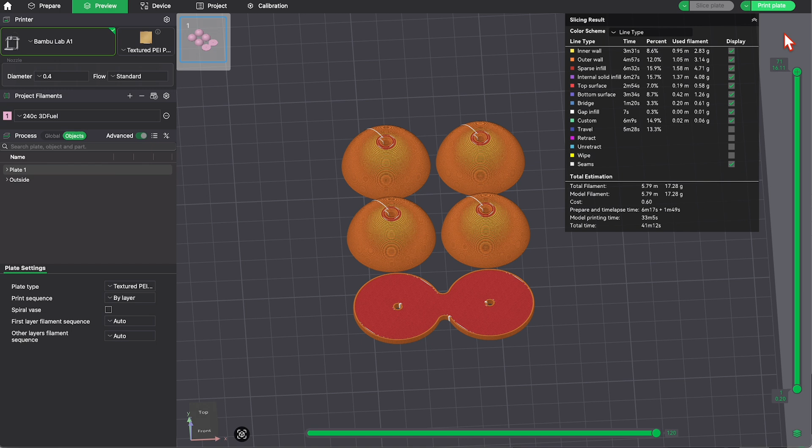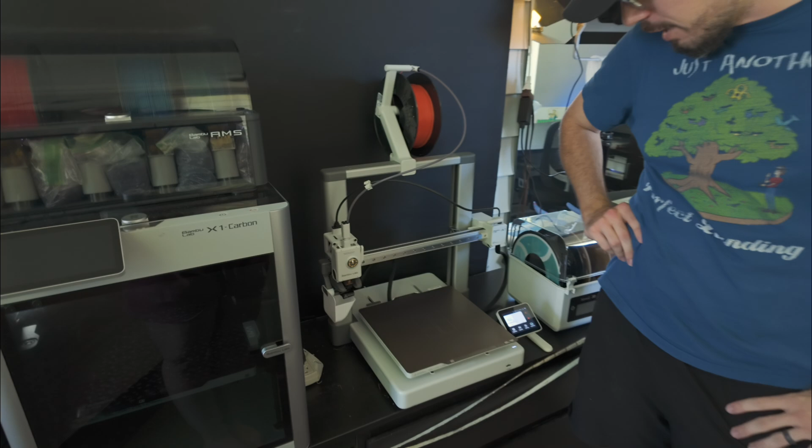And I got this all messed up here. There we go. All right, so we're going to send that over, and I'm going to click Print Plate and send it. Should take about 17 grams. Good celebratory knuckle crack. And we'll get that baby going. So we'll check in on it when it's actually printing, and then we'll check in on the final amount.

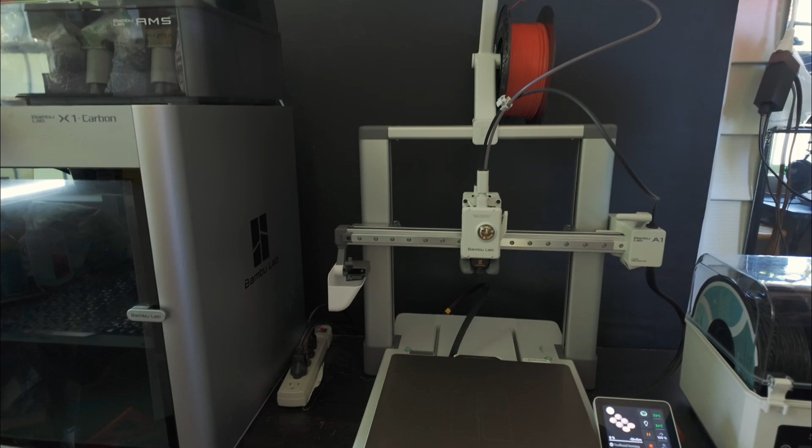Looks like I have about 7 minutes left. I don't know, I wasn't really reading it. More than 5. That's kind of how I tell time. Like more than 5, less than 10. What is that? I don't know. So there we go. So she'll just take it away from there. Or he, I don't really know. It's a 3D printer. Didn't really think that through. In any case, we'll be right back.

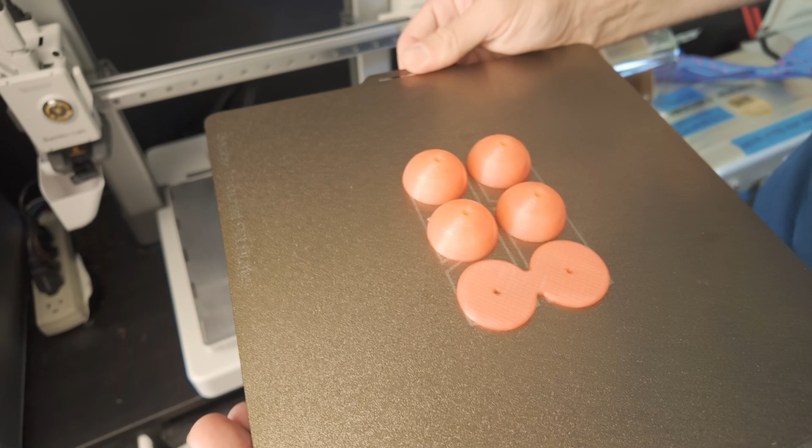Like magic, it's done. Here it is. Give it a little bend. Pop right off. There we go. Get that off of there. Let's take it over to the bench. Slide them off. And take this plate back. Put it back. And we are ready for the next print.

All right, so basically, here's what we're going to do. So first of all, here's the original. This was our first test here. You can see there's this gap. And then you can see each of these hemispheres spin independently of each other, which is cool. So I think I might call this the Slippy Sphere. I don't know. Anyway,

now we have a piece of filament. This is actually PCTG, but that's fine. You'll notice it's curved, which is not ideal. So really, I might need to straighten this potentially. But that's why you see how the two halves are not straight up and down, they're not tight and evenly spaced. And that's because of the curvature of the filament. Also because we just have this very thin connecting bar.

So now we have this nice thick connecting bar, and it should be much more durable. And it's kind of cool because this filament's kind of translucent, so you can kind of see through it a little bit. And then we have our spheres. That feels pretty good. Feels pretty nice and smooth. Yeah, quite nice actually. I'm gonna cut the end off of one of these guys. Let's see, will it fit through the hole? Oh, like a glove. Like a glove.